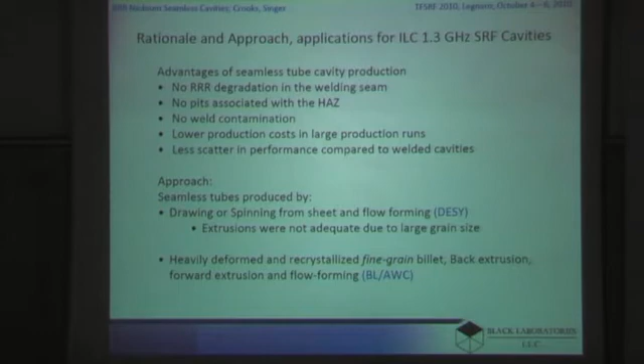The reason we want to use seamless cavities comes from problems in welding of the standard production method. Standard production of niobium cavities from sheet is to deep draw half cells and weld them together, and for an ILC 9-cell cavity, that means at least 17 welds in just producing the cavity before the input couplers are added. Whenever you melt niobium, even in a high vacuum, you're inviting problems with impurities. In addition, there are issues with pits associated with the heat-affected zone, which have caused a lot of cavities to be rejected.

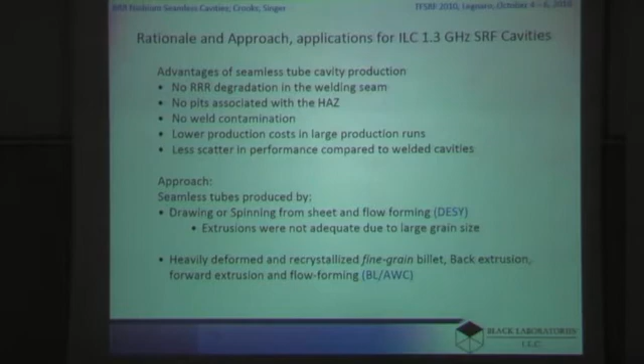I don't know the specific percentages, but of the ILC cavities manufactured with a target accelerating gradient of 30 to 35 megavolts per meter, quite a large number have failed in the 12 to 15 megavolts per meter region due to thermal quenching associated with pits. This might have to do with contamination, or with other problems associated with recrystallization near the weld. The weld itself is a problem in that it's not smooth and might contribute to magnetic field enhancement at the equator.

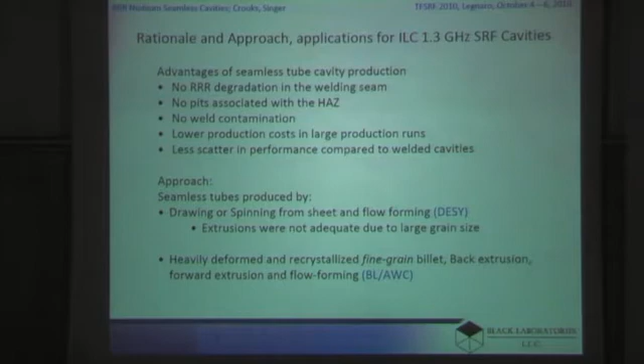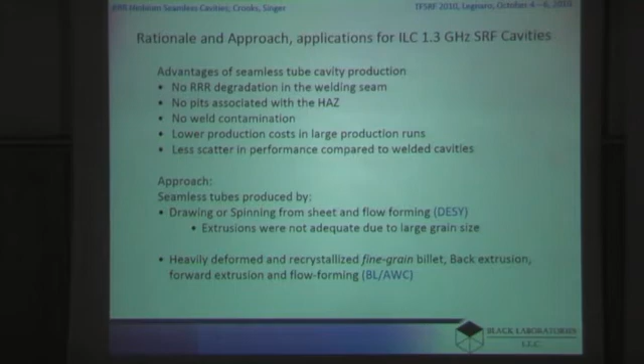The approach here, we've used two approaches. In the work at DESY, after trying a variety of spinning and drawing methods, they chose a method of producing tubes from sheet by spinning or deep drawing, and used those after flow forming to provide the tube for hydroforming. Their work with extrusions were not adequate due to large grain size.

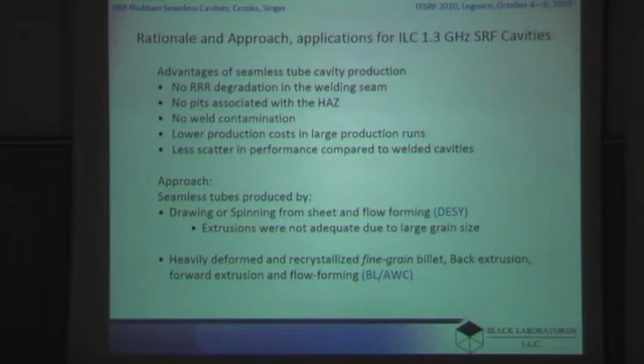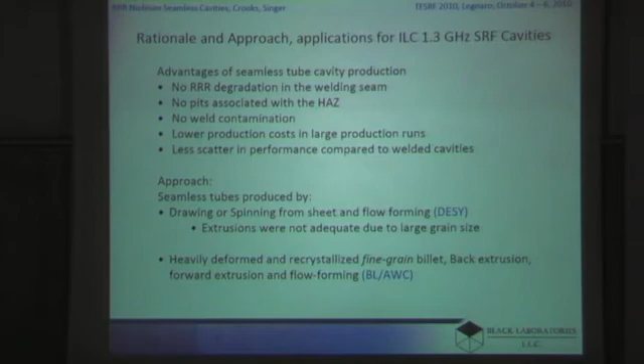The difficulty with using tube produced by the deep drawing method is that the total length of the tube is limited by the width of the sheet. There's only a certain length of material you can produce in a rolling mill, and tubes of great length with uniform microstructures haven't been produced. Another issue is that in the deep drawing or spinning method of tube from flat material, the properties are directional because of the directional properties of the rolled material, and that causes a problem in hydroforming where you'd rather have axisymmetric properties.

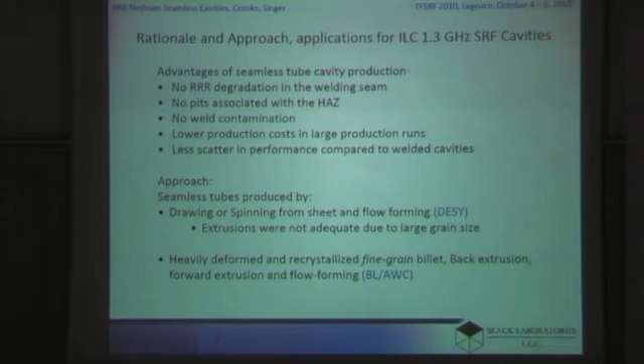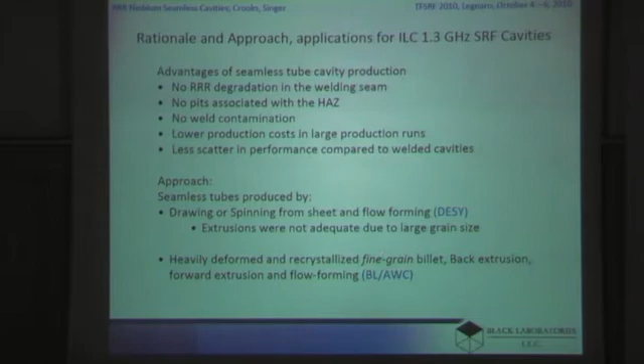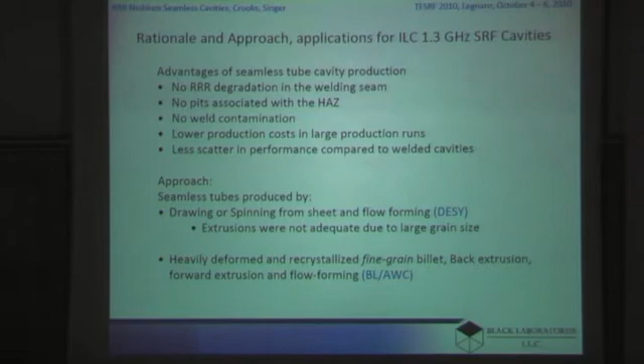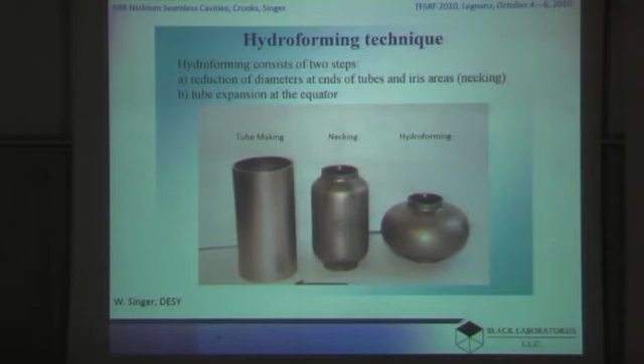Our approach at Black Laboratories, working with ATI Wah Chang, was to produce a fine-grained billet initially by heavy working of the billet, recrystallize it, and use that as a feedstock for an extrusion process. For both of these processes, the tubes were produced and necked by spinning at DESY to produce the iris regions of the cavity, and then expanded by hydroforming. The dimensions chosen here were for the ILC geometry of approximately 200 millimeter diameter of the equator region.

The two methods of tube manufacture used by DESY involve spinning and deep drawing. The spinning method is to take a sheet and wrap it around the mandrel by spinning the support and then applying external pressure by wheel. In deep drawing, the sheet is pushed through a die into a tube shape.

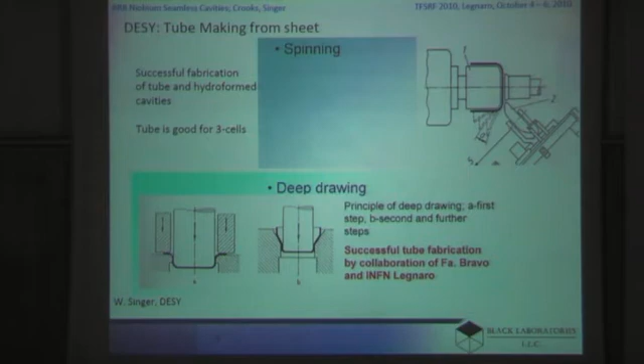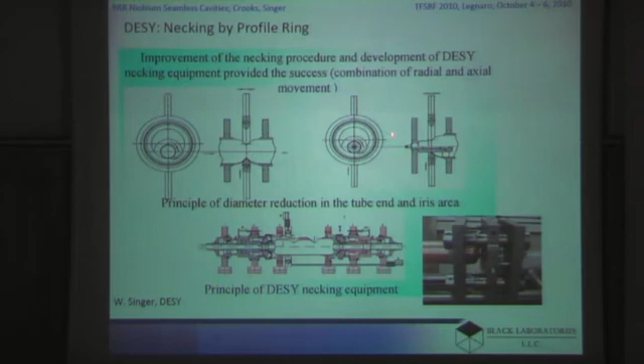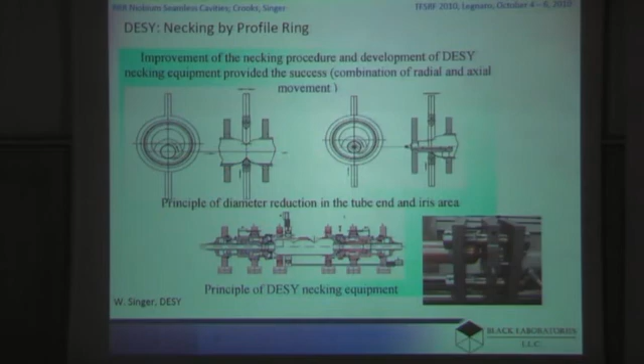The irises are produced at DESY by a necking process using spinning, or what they call profile ring spinning. The difference between that and other types of spinning is that instead of using a small wheel on the outside, a large wheel is used to apply pressure, and it's moved both towards the axis of the tube and in and out of the plane to provide the profile shape of the iris. After the irises are produced on the tube, it's then placed in a hydroforming device.

This particular device at DESY was manufactured in Russia and modified at DESY, and uses a hydraulic system with oil and water. The irises are placed at a larger distance than in the final product, and moving dies are used to push the irises together as the interior of the tube is expanded. You can see some copper pieces here — copper is the method of choice for experiments because it's a lot cheaper than niobium. The oil hydraulic system is used to press these dies together, and they're expanded inside the aluminum dies shown here.

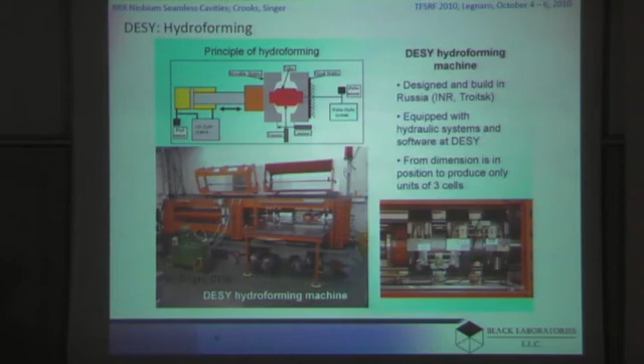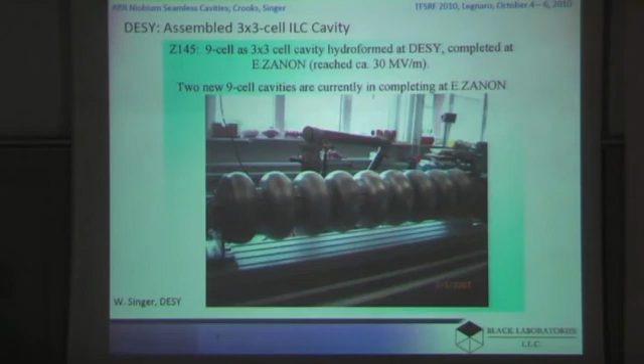The best result so far from the DESY work is shown here in its welding stand, I think at Zanon, and was a 9-cell cavity which was able to reach 30 megavolts per meter accelerating gradient after electropolishing, I think.

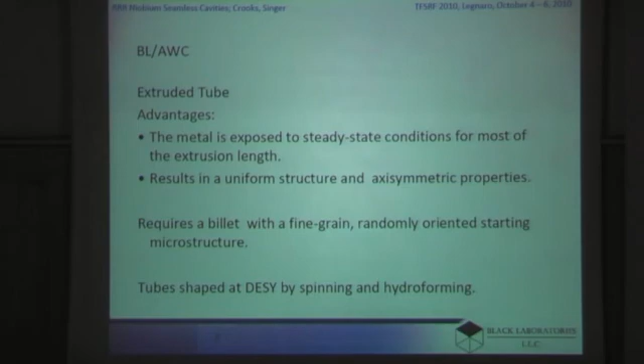The method we chose, using extrusion instead of spinning or deep drawing for the tube, was intended to give us a long tube with uniform properties, which can be done with extrusion, providing we're able to maintain a fine structure through the extrusion — a fine structure and also a crystallographically weak texture so that it gives us uniform properties. To do that, we spent a lot of effort looking at the effects of severe processing of the bulk material and recrystallization processing, and produced a fine uniform billet.

I'll show you a little bit of the microstructure of the different methods we tried. The method on the left gave us an extremely fine interior, but after recrystallization — this was in a small billet diameter of 50 millimeters — the structure coarsened and also showed texture banding, which happens in niobium under some circumstances of severe deformation. The second process is the one we ended up choosing, showing the most uniform structure, while a third process also showed a non-uniform structure.

Another indication that this was the most useful is something we rely on a lot to project the stability of the fine-grained structure: the grain boundary angles showed a nice distribution. Instead of going more towards the low angle boundary side, the boundaries in this section were peaked towards the high angle and showed quite close to random distribution. We also looked at the crystallographic texture intensity, and process B had, from the outside to the middle and halfway between, the most uniform intensity of texture.

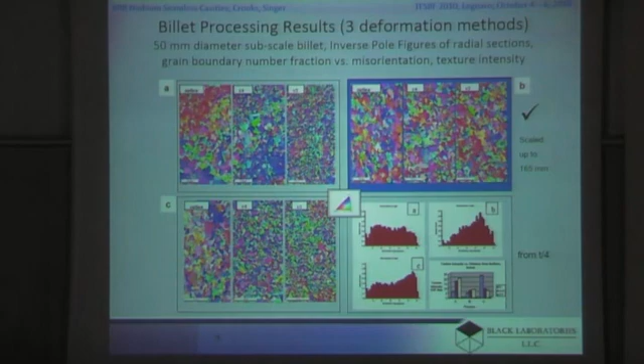When we produced the tube,